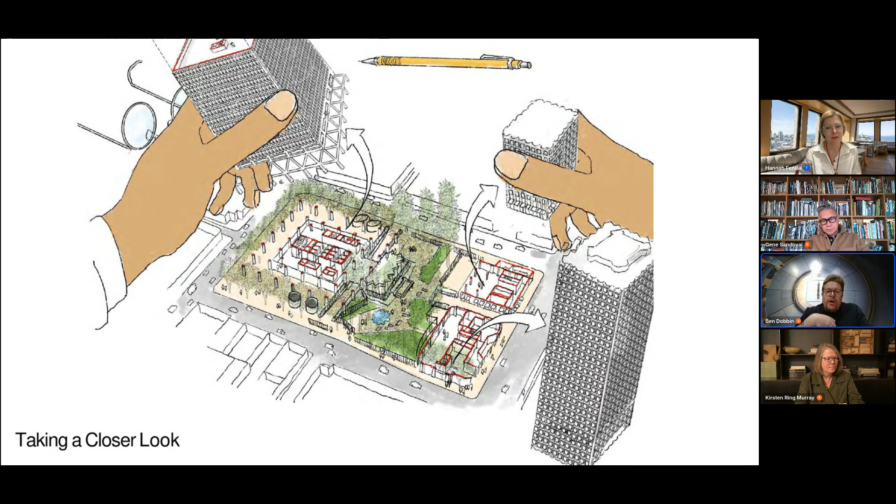For us, everything was about taking it apart, really examining how the parts relate to each other, what's been added which isn't required, what has been added over time, like accretions which weren't really in keeping with the original vision, throwing away some of those parts through the evaluation process, and then seeing what is the richest part of it.

For us, the Redwood Park, which sits actually almost at the back garden of the Transamerica Pyramid, is actually the centerpiece between these three different major buildings which sit on the site.

For those of you who don't know, the Redwood Park is a great refuge within the city. And that was really our starting point: can you take the spirit of the Redwood Park and spread green and unite the site in a carpet of green and planting and biophilia to mend around the edges of the city.

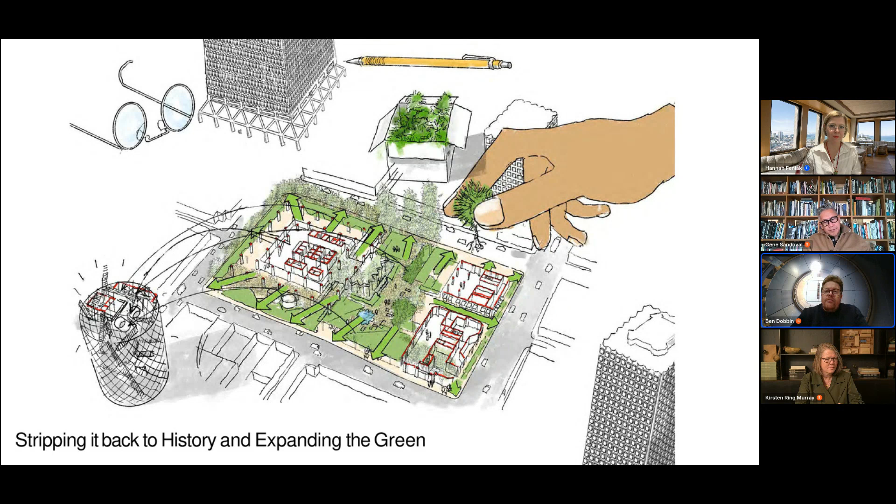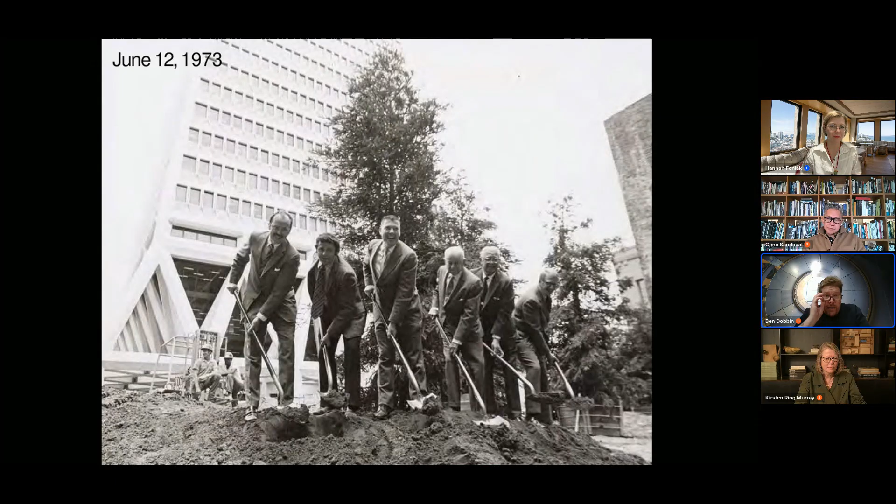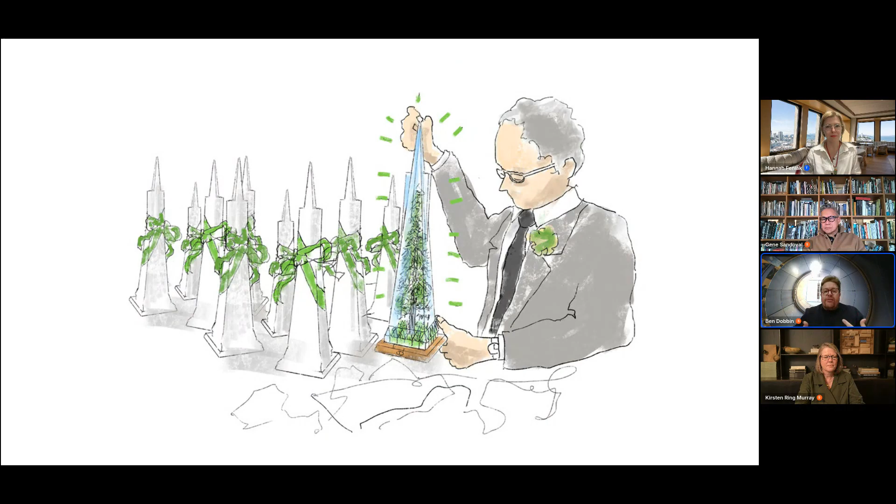This photograph is really brilliant because it shows, in 1973, planting those redwood trees, which were only about 15 feet, 5 meters tall at the time. And they've grown to 60 feet, 20, 30 meters tall. We consider those really a gift from history. So when we talk about how we work with existing buildings, they are a gift. Someone, an architect, a great thinker, a landscape architect, had a vision, and something like a tree which grows over 50 years to become something really iconic, something you couldn't even buy today if you wanted to do it today.

So that's back in the 1970s. You see those tiny little redwood trees, which were grown in the Santa Cruz Mountains, and then what they grew to today. There's a lot of features here which are original, the kind of pixelated edge to the water pond, not the frogs which are dancing within it, not the stage which is over here, which removed a number of fruit trees from the park.

So for us, it was like, how could we actually mend this? The ramp over here was not original. So we went back to even the landscape architect's drawings, and there we found, for instance, there's a row of trees. If you see that horizontal lane, which is Mark Twain Alley, Mark Twain Lane, there's a row of fruiting trees which were coming down there. So there were a lot of clues when we went back to the original drawings, which told us about how we could actually bring the building forward in the future.

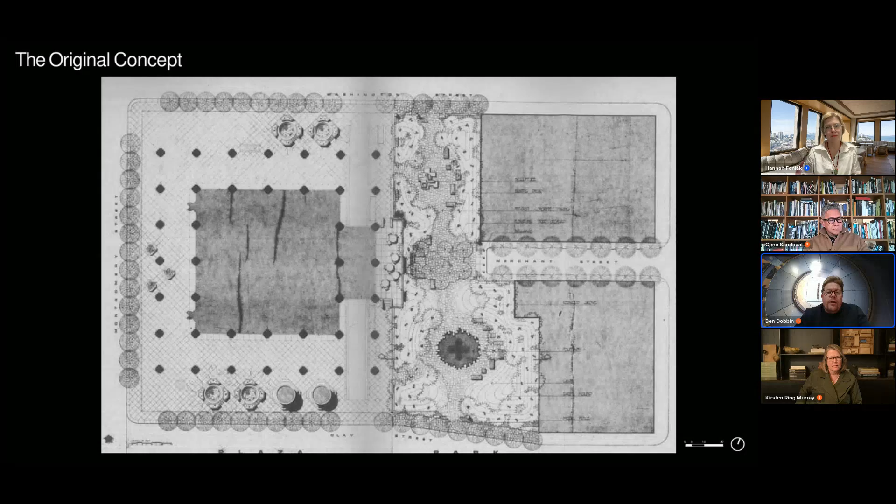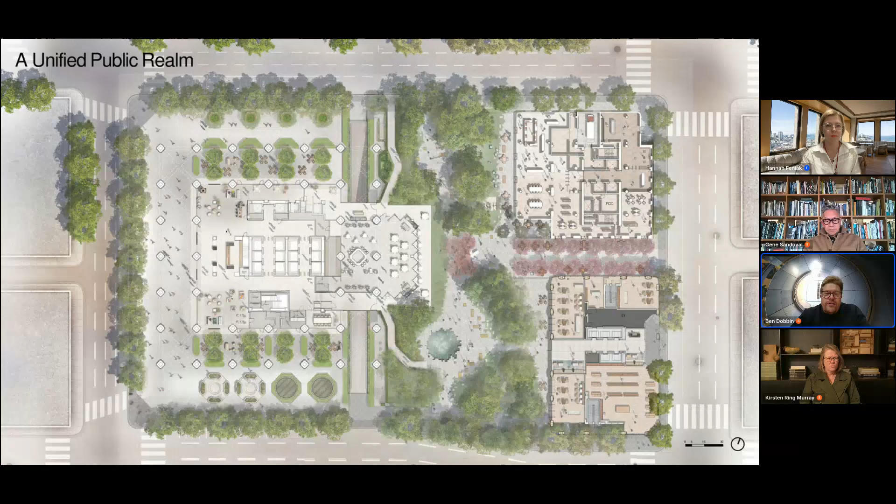So the vision here starts to unify green around the site. We're planting those fruiting trees all the way along Mark Twain Alley, and we're seeing the Central Park as a uniting feature between all the different parts of the building, the master plan.

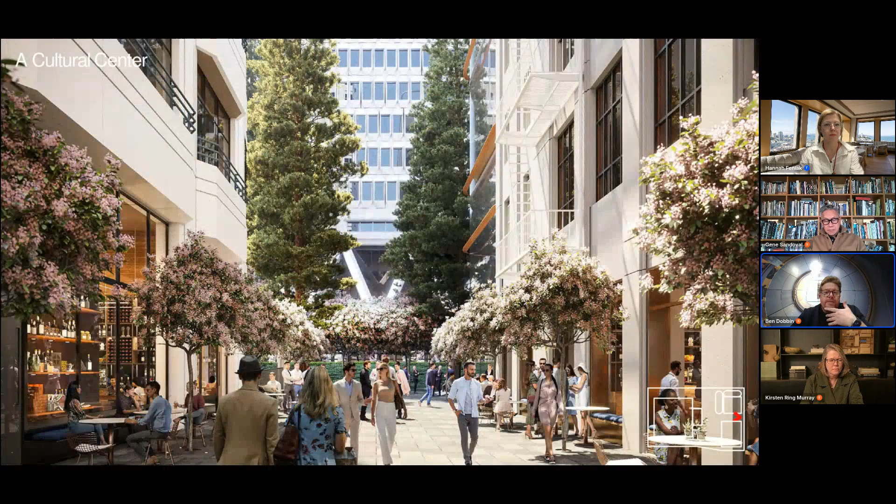And a site which was a park that was walled in, we removed those walls, and what it is today actually expands the feeling of the park. So the park actually doubles in size by building out these open seating areas which are fully open to the public during the day.

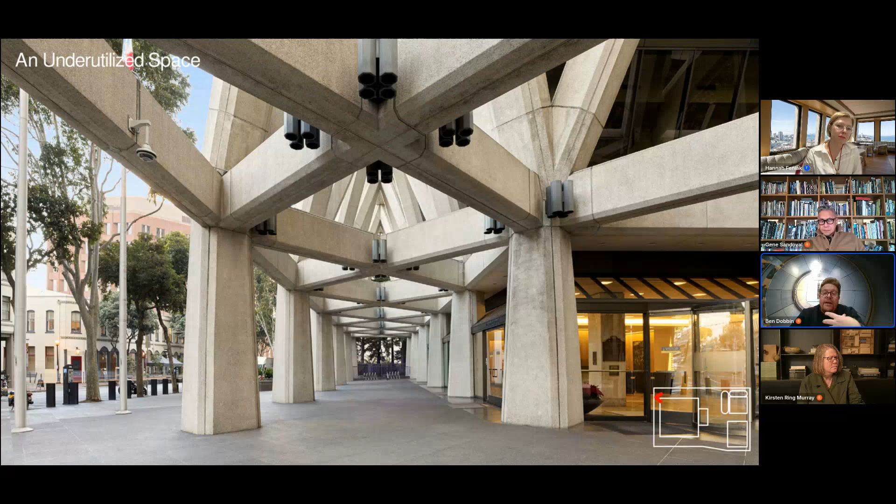And of course, expanding the green. So we planted trees throughout this colonnade and actually made it feel more natural. And we broke down the facade, which was around the base of the building, opening it up to a pure, clear glass facade with a minimum number of structural elements. So we really dissolve the boundary between inside and outside. And then we brought the seating outside as well, and this is seating which members of the public can also use and come here. So we're actually giving, the building starts to gift out to its environment.

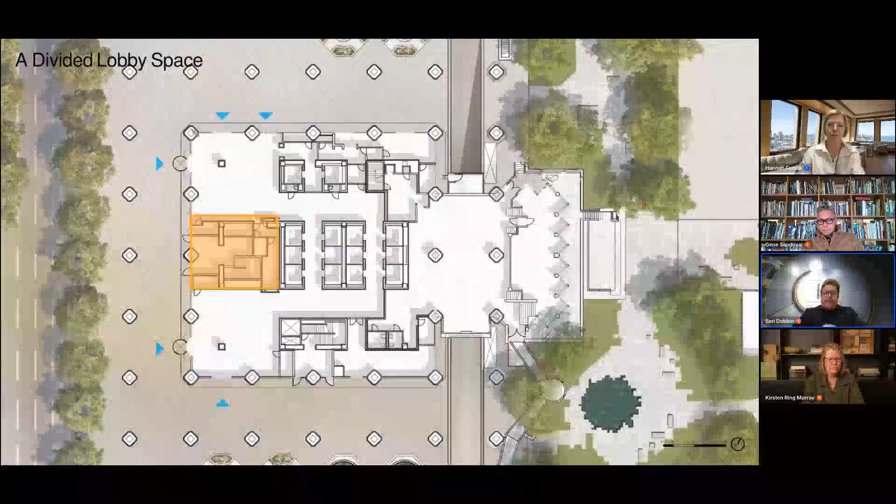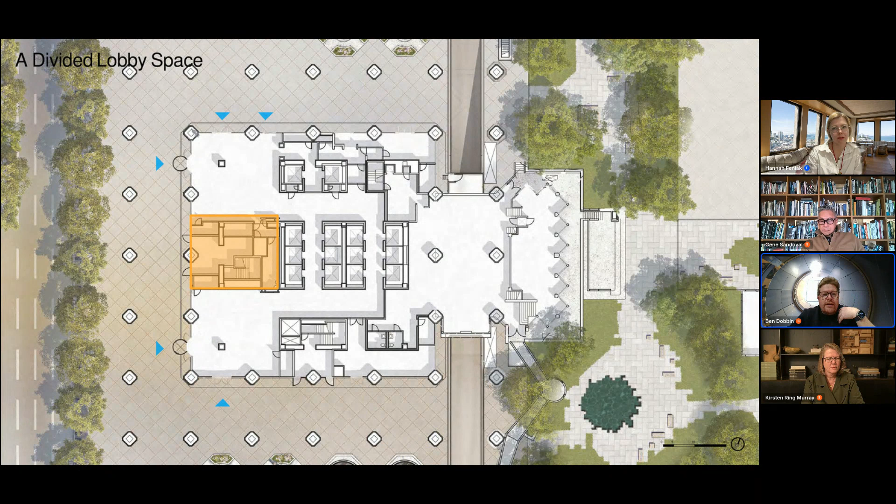Crucially, the building, when we encountered it, had two lobbies which were separated by this core, which is highlighted in orange. And that sort of comes from the early days where there was a banking floor at the base of the building, and there was a corporate tenant taking ownership of the whole tower. But this plan moving forward was to create one unified vision. So we were able to reroute the escape stairs and a lot of MEP and create one unified lobby together.

And that gives something back, again, something of the sense of arrival, something for the people who are using it, and create spaces where people can also meet clients before and after meetings. And what was a very closed environment—you can see half of this facade is actually opaque—we could actually transform it and make it more open.

And with that came raising the ceiling on the inside, removing several feet of ductwork, going to a radiant slab with a minimum fresh air approach. And so then the structure of the colonnade could run through horizontally and again dissolve that boundary between inside and outside.

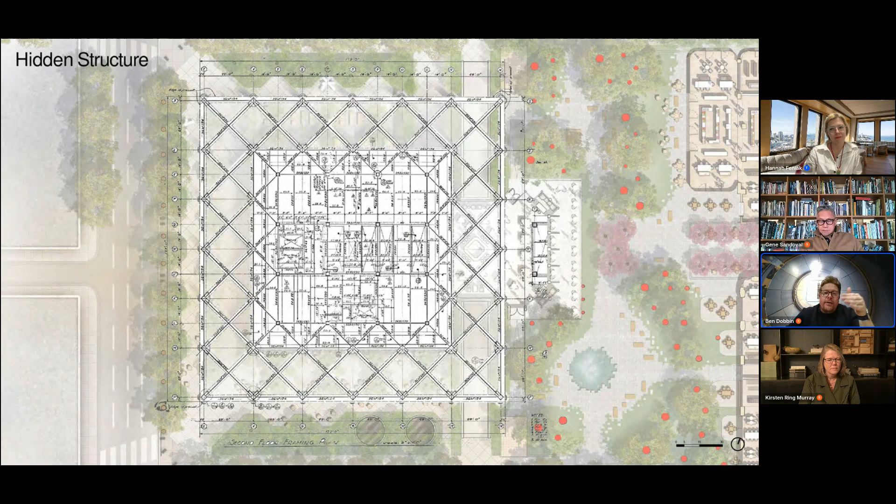This is the horizontal framing plan at that colonnade level, and that diagonal bracing structure continues onto the inside. So we used that plus the kind of innovations of seismic design which were incorporated into the original design—this cross bracing, which featured in Welding Design and Fabrication Weekly.

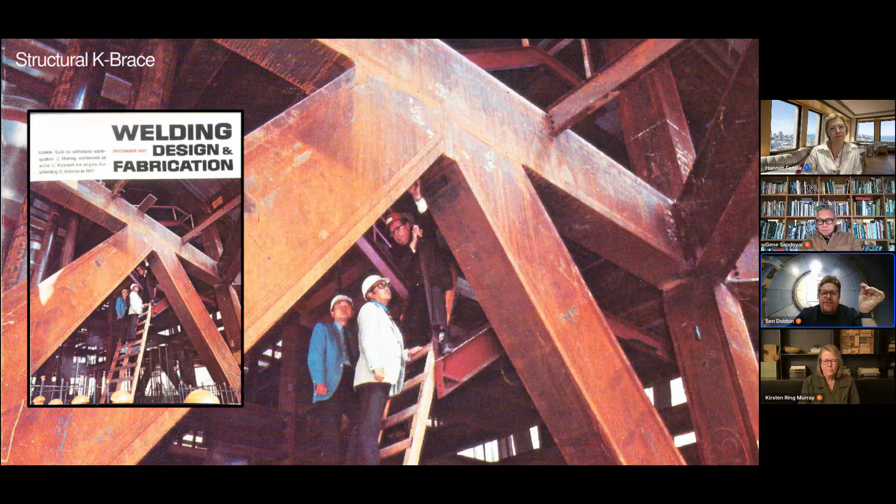This is something we then brought out of the concrete, and we exposed it, and we made it a feature, which then becomes the sense of arrival at the building. It's a kind of a portal, which was originally like within the building. So we uncovered things which were great strengths of the building, then made them features which actually become expressions of the building's architecture.

And we had to be very careful then in how we followed through the detailing of the external architecture into the internal architecture. The concept we were carrying forward is to work in balance and in collaboration with William Pereira.

So we really studied the detailing of the precast framing around all of the different structural elements, and we carried that forward faithfully. And then the challenge was to match the concrete material, which had been aging for 50 years on the outside of the building, and how to transform and bring that into the building.

We worked with the same fabrication company who'd made the precast panels back in the 1970s. We did have to go through about 50 samples, though, to get the right color match, but that was an effort well worth it for the result you see here, where it becomes almost seamless as to where the historic starts and the new begins.

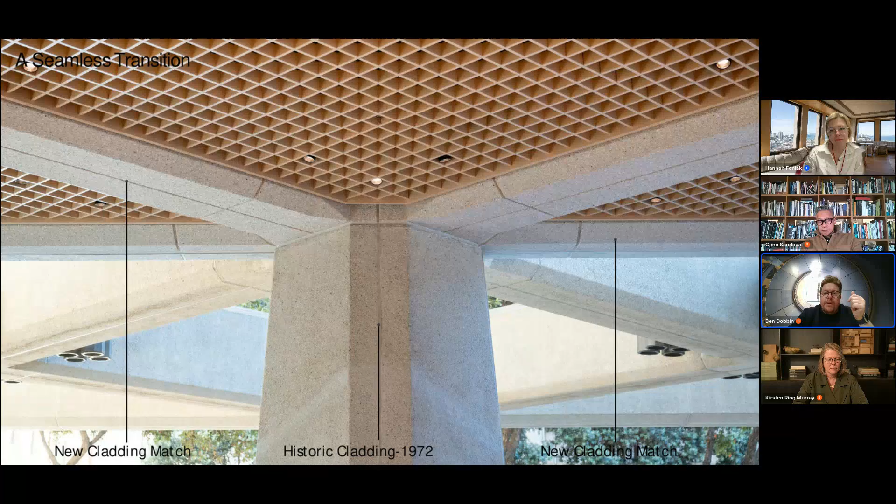And in this case, I think that is entirely the right thing to do, because we're trying to create that experience of bringing people into the lobby and breaking down the boundary between public and private. So that was really a transformation at the ground floor, which was at a larger level, at the master plan level.

And then we made a few further interventions higher up the building. So level 27 is the transfer level from the lower elevator bank to go into the high-rise elevator bank.

And so that becomes an interactive level, a lounge level between different people who work inside the building, and you can bring tenants there. The level below that is a gym and wellness area, because that's also just off that sky lobby level, so it's easy to get to for all the tenants of the building. And then there's a marketing suite, which I won't dwell on today.

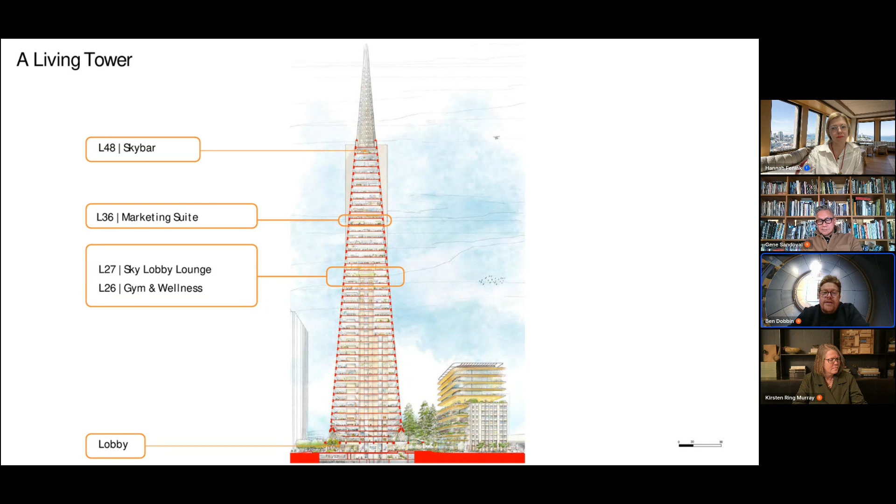And then at the top, we transformed what was formerly the boardroom for Transamerica into a sky bar. So this then becomes the gym level.

So transforming that experience using a lot of reflective glass to bring light from the outside into the depth of the plan, and create one long zone along the edge where we broke down a lot of the smaller containment of areas to create one big space which would unite. So you can be on your running machine, and then you have an amazing view across the whole of the San Francisco Bay.

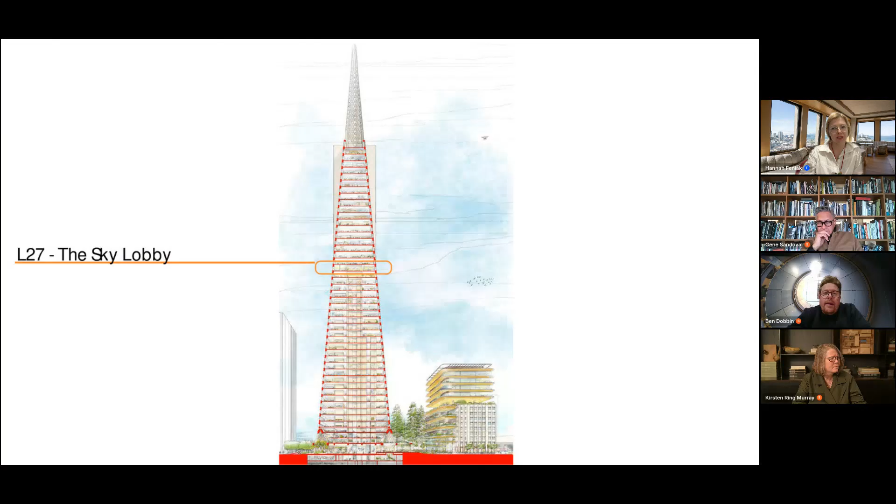And then moving up to the sky level, you can see here, you're on the same level as Telegraph Hill and the Coit Tower, which is another great icon of the city. You're looking across the North Bay, and for those who know San Francisco, you can see the Golden Gate Bridge, Alcatraz, Angel Island, Oakland.

You can see all the ships moving backwards and forwards to China. It is an incredible space. And this is our Sky Lobby, and it unites everyone—everyone can come to this space. It's a place to meet clients. It becomes almost a center of culture.

And then there's even a sculpture which Norman created within the boardrooms at this level. And that, I think, is a really strong link to the clouds, which somehow spread within the city of San Francisco. And then the last floor...

becomes a bar and cocktail and event space at the very top floor with amazing views across San Francisco. It's a place which again becomes a community for the tower. People come together here for happy hour. You can bring clients here. You can rent it out.

So this amenitized office is really bringing this landmark forward into the future, and really thinking about how it lives on into the next 50 years of its life.

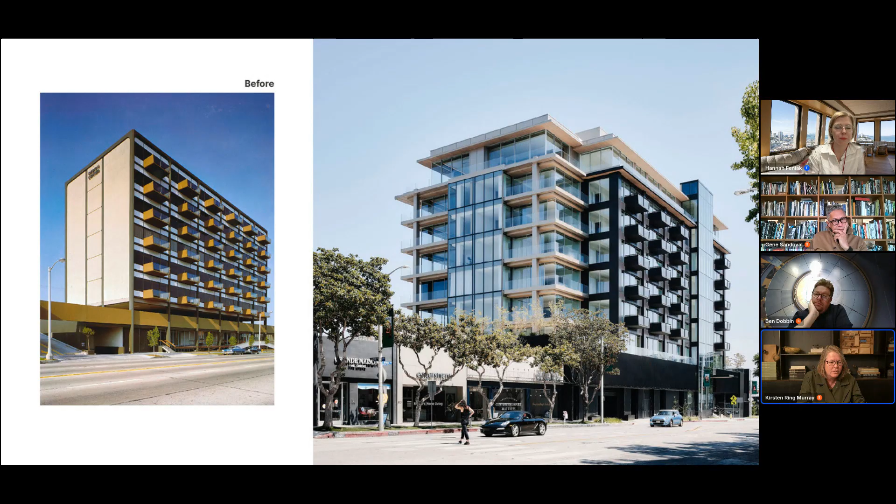So you can see here, this is a little bit of a before and after. And I think at the time, this was not a historic building at all, not historically designated—a building that maybe only an architect, or a design geek so to speak, can love. It had really a lower level of use; most of the upstairs office spaces were vacant. It had become rather run down, but of course its value was in the embodied energy within the concrete structure.

That's primarily what this building was. Some aspects we thought were really important to preserve and celebrate within the facade, including these really distinctive balconies, which we did a subtle edit to make code compliant for today's uses. And then this concrete megastructure, which, as you can see in the larger elevation, we actually contrasted with a distinct black tone so that it was legible and read as an element within the original composition of the project.

So the project really used the transfer of development rights along that townhouse corridor to be able to not only convert this use, but expand it in three directions—to the east, west, and north. You can see in this juxtaposition of the old and new where we did this more glazed, light expansion, which was really necessary as it was going from an office to a residential use.

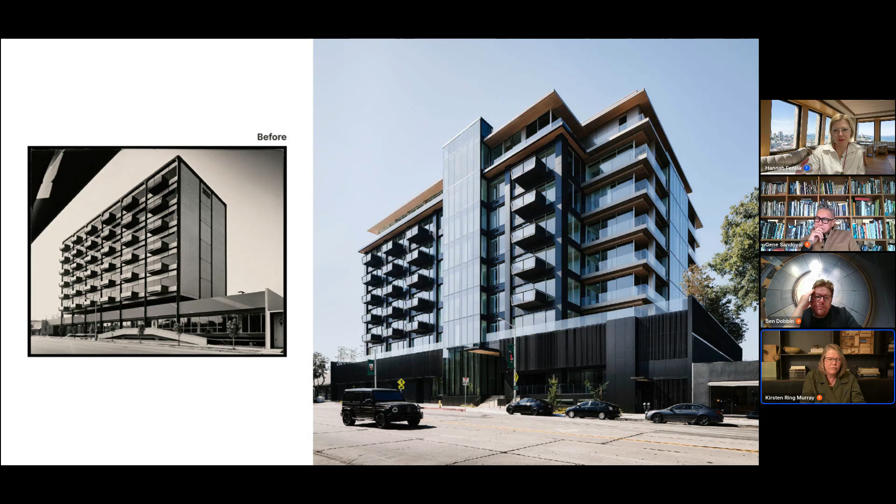A lot of our amenities went into some of these elements in the podium. We also introduced a vertical glazed element to really mark the point of residential entry into the project, which we felt gave it a sense of hierarchy and a legibility of function that we needed within this conversion.

Here are a couple of plans. To the left is the ground level, which shows our entry condition and how it basically breaks into retail units. To the left you'll see our parking entry, and up and to the right, there was a variety of different residential scales, from studios to two and three bedroom units and everything in between, including a floor of affordable rental units that had two bedrooms.

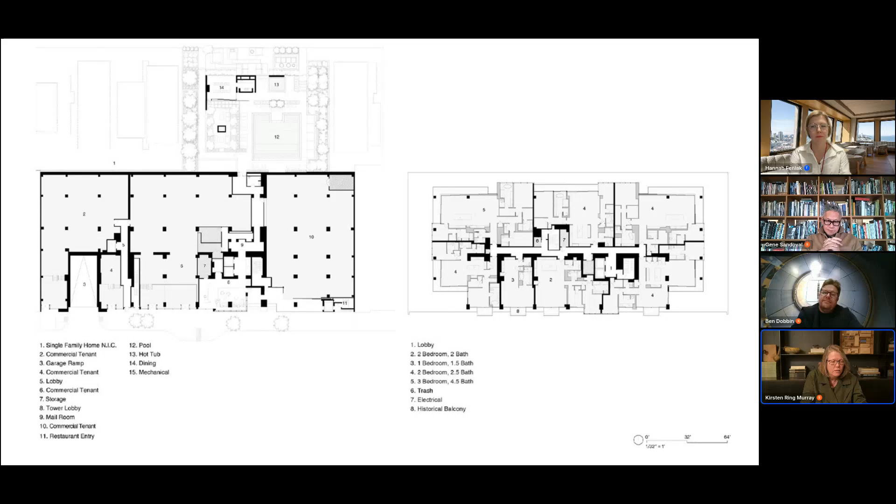In section, now this is, I think, one of the things—and actually when the project came to us, I think we were surprised by the ambition of the project. It was somewhat of a humble commercial building, and one of the ambitions was to replace an elevated parking structure that wrapped the base of the building, change the uses, fulfill interior uses into that space, but also excavate underneath the entire townhouse portion of the block.

We also did have to do a lot of excavation under the building structurally. So that allowed us to put all of the parking that had been existing in above-grade structured parking below grade, which was significant. Also to the right of this image, you'll see a few things in this section.

I think one of the things that was beneficial—and this was really before there was as much dialogue about underused office buildings, I think it's been sort of a COVID-era goal, to think about what to do with underused office buildings in residential conversion. This was a little bit before that dialogue was at as high a pitch.

But one of the challenges is dealing with the integrating of systems, particularly plumbing systems, which are much different in a residential building. But we did have good twelve and a half foot clear heights to work with, so we were able to accommodate and weave through a lot of those systems and make it a viable project from a development perspective.

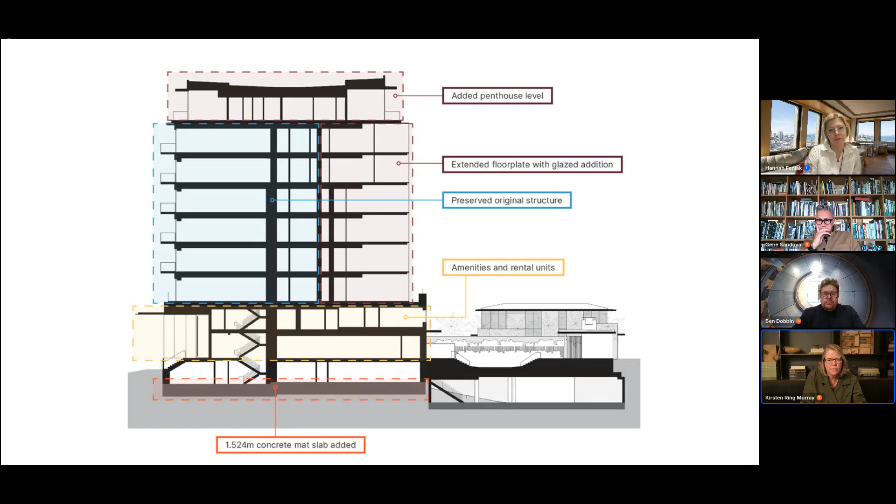Again, we have another shot, as we did see with the Transamerica Tower. The below-grade construction, I think, was fascinating. We did have to reinforce and bring the building up to contemporary seismic performance.

We introduced basically not only the excavation that allowed us to put in this below-grade parking, but also we have about a five-foot deep mat slab to meet some seismic requirements. That was all done with the structure of the building in place. There was also a lot of carbon fiber wrapping of particularly sensitive connections between the concrete column and the waffle slab structure.

In this parking, again, we're in Los Angeles. Parking is important, and in fact, we had a parking requirement, and we wanted to actually elevate the experience of the parking.

This is one of the areas that does have a valet condition, so we're pulling that loading and unloading into restaurants and some of the retail. We have an opportunity to pull that inside and really treat it as an elevated space, in addition to some private garages. And to the left is our parking ramp.

We really wanted to create a generous ramp so that we were minimizing car impacts on Beverly Boulevard. But again, just embracing the experience that the car really is part of life. It was important to the community that we were mindful about remembering that aspect of the development.

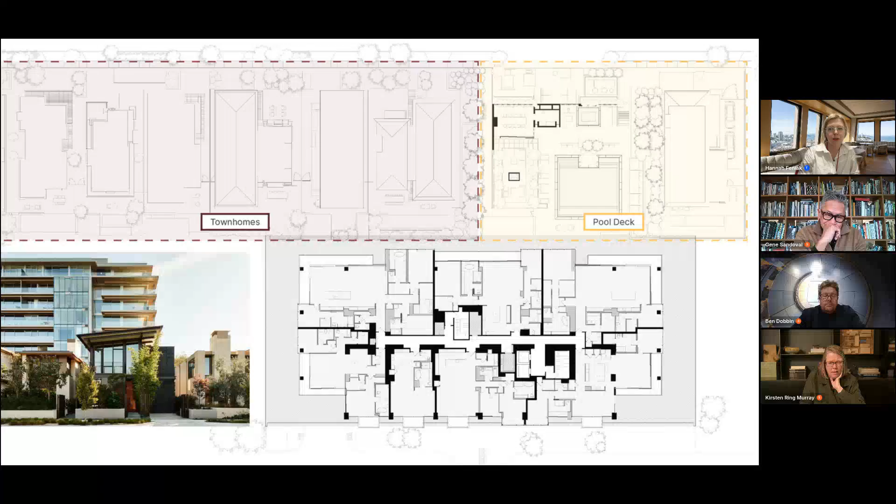A little bit of the interior, and then working with really compact spaces, we're able to create a series of spaces that really mitigate public to private conditions between the tower, the townhomes and the surrounding single-family neighborhood. To the right are some little pocket courtyard, backyard spaces and terraces that we created to really weave these different scaled elements together into hopefully what is a fairly nuanced composition of public and private spaces.

And finally, our shared pool amenity. On the left, you can see the feature of the lightness of the new expanded floor plate area, and then the maintenance of this mass and scale and expression of the tower itself.

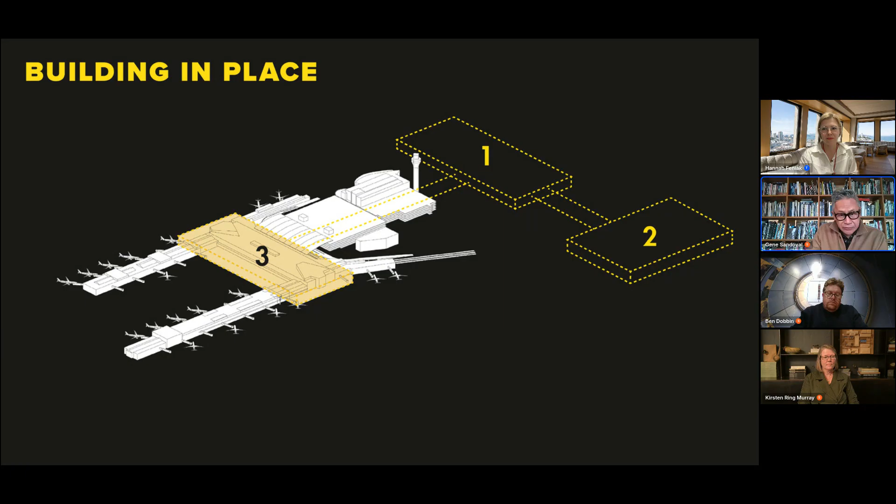Then the combination: how are we going to create something old and something new, or could we build it together? So just to give us an orientation, this is an H design configuration airport. What we wanted to do was build over the existing terminal, number 3, to double its size. There was a lot of conversation about where it needed to go, but we ended up going with configuration number 3 because it saved a lot of money and a lot of infrastructure.

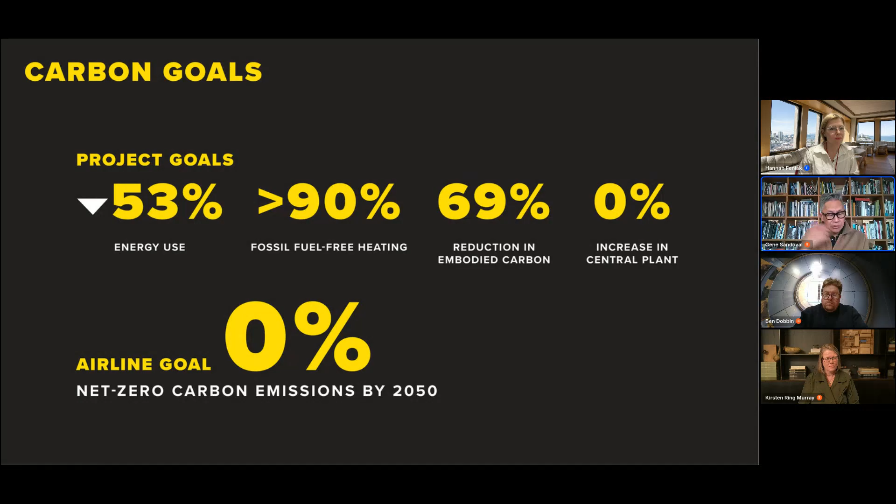There was a really high carbon goal that needed to be hit, driven because a lot of airlines signed to get net zero carbon by 2050, and they're struggling because the fuel development and engines are not there. So what we wanted to do was ask, what if we can lower your carbon footprint on the ground, and it would help with the overall performance of everything else that we cannot control because that's not architects' domain.

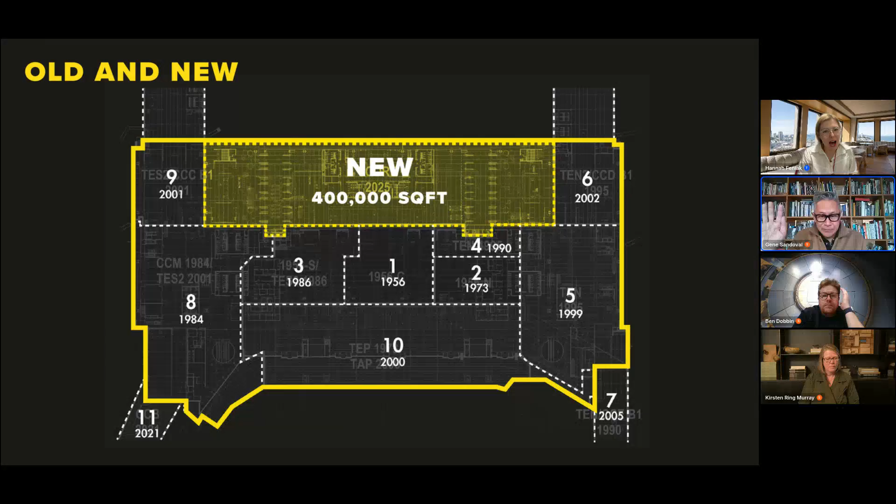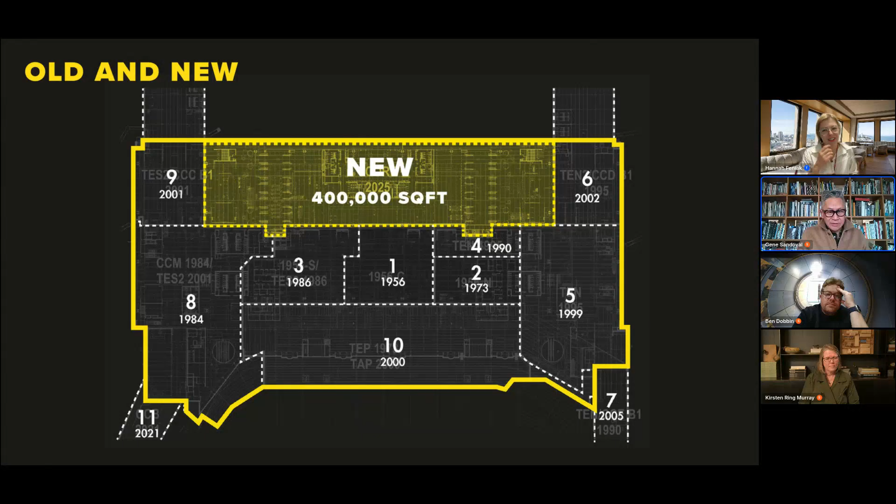Here again, the building—this is the terminal. It's 11 different buildings; part of it was mine and part was my older partners' that we worked together on. The whole idea is how do you stitch it together into one whole new building, even though you're growing the capacity to double the size.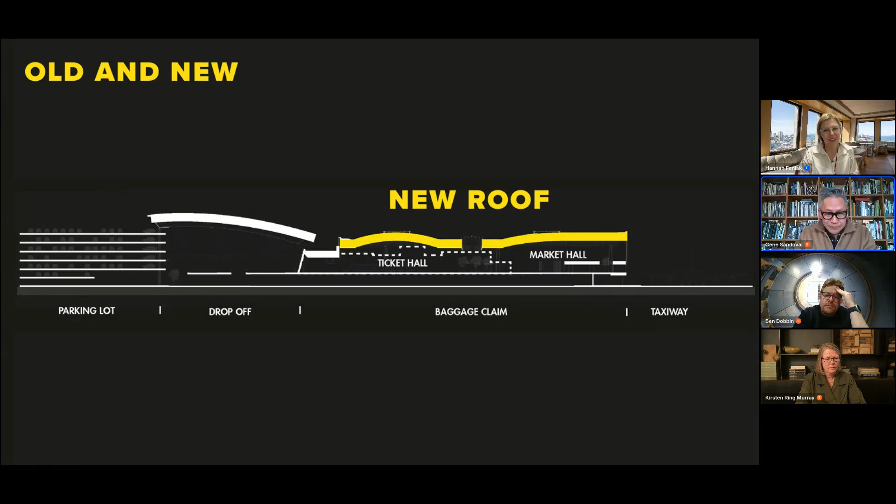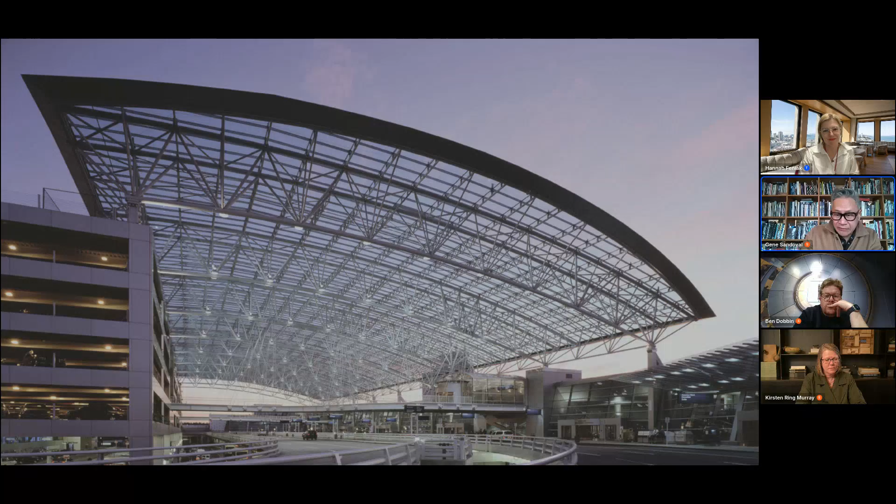Our thinking was, what if we built a roof over it to keep us dry and find a way to keep it safe? And there's been such strong language around it—this is the most beloved roof in Portland. It rains a lot here. It allowed sort of a welcoming of passengers who arrive and depart, and became an iconic memory for a lot of people. What we wanted to do was get inspiration from that big roof and create 2 more, so you could get a set of 3.

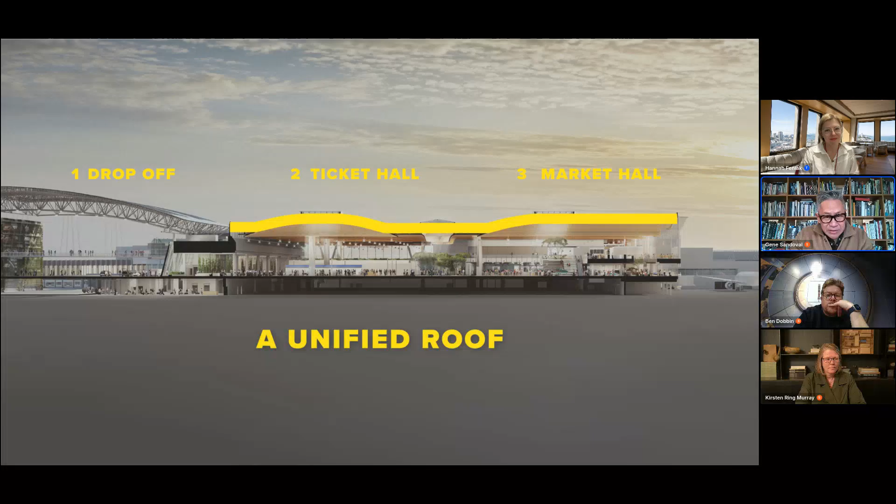At the same time, we're going to keep the baggage claim operational along the way. Now, we had a really daunting task. If you work in an airport, there's hardly any time to work in it because the runway is down for only a very short period of time. You cannot use a crane. So we had to be really creative in the construction side of things.

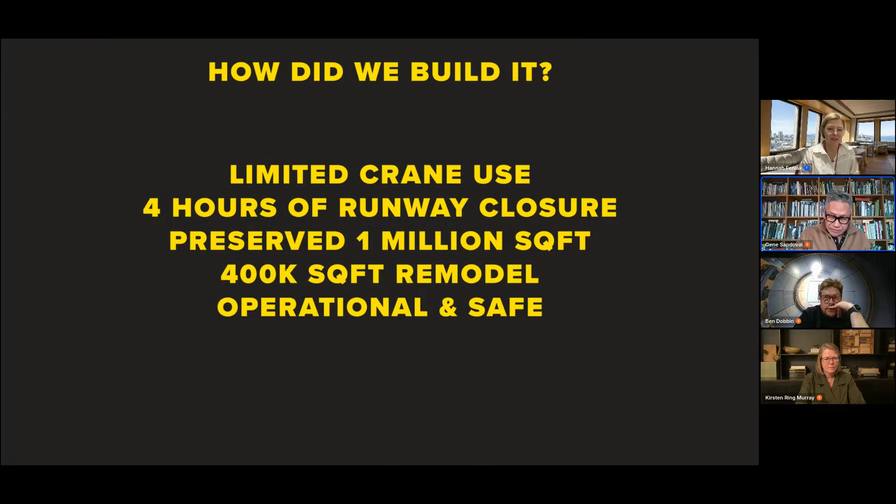So what we thought was, what if we do everything prefab? We thought, what can we do?

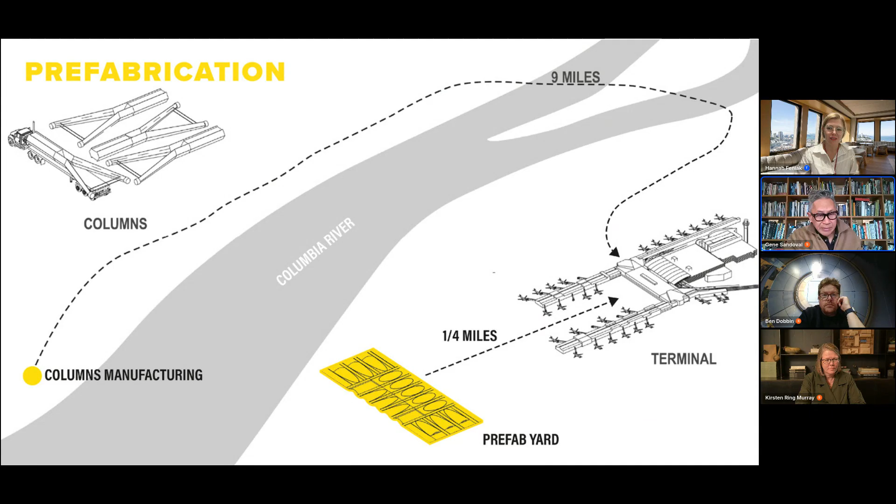A prefab yard about a quarter mile away from the terminal and runway, and then we used a steel mill about 9 miles away on the river for doing our columns. Those are all 70-foot columns.

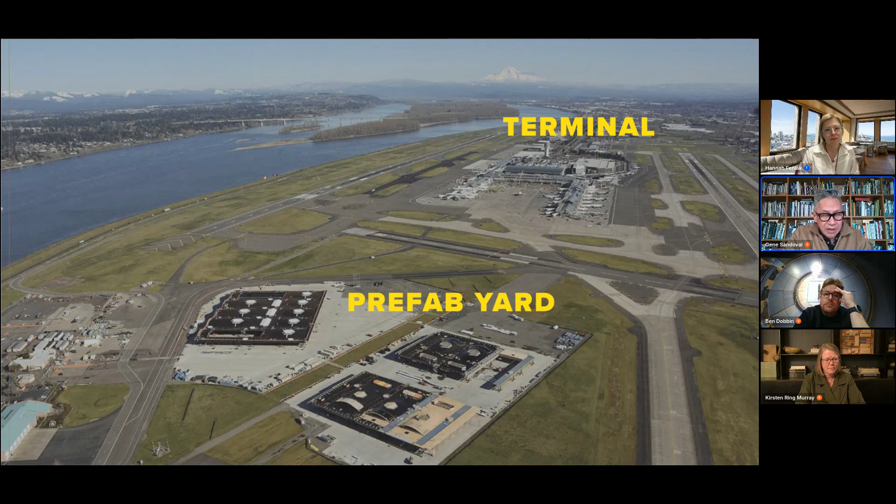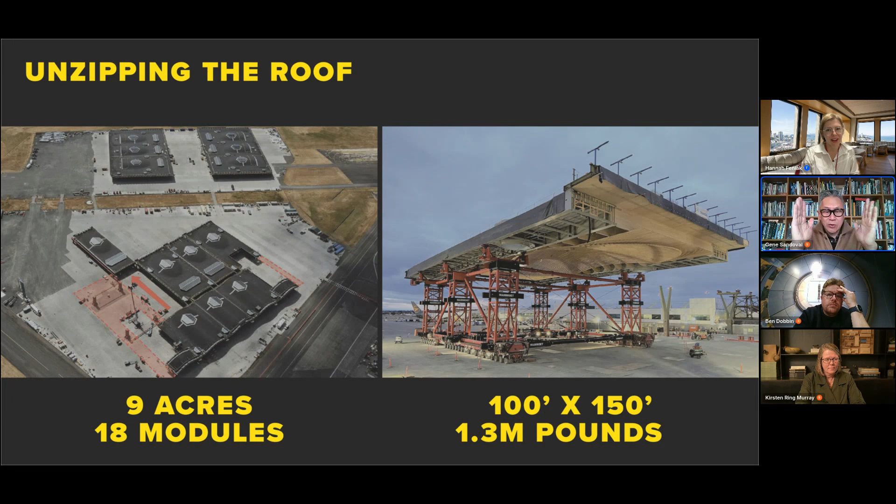Here's the picture: at the prefab yard, we're able to put 18 of those modules along the way. And then we would unzip this module in 100-foot bays and slip it in place within a 4-hour window to cross the runway in that one evening.

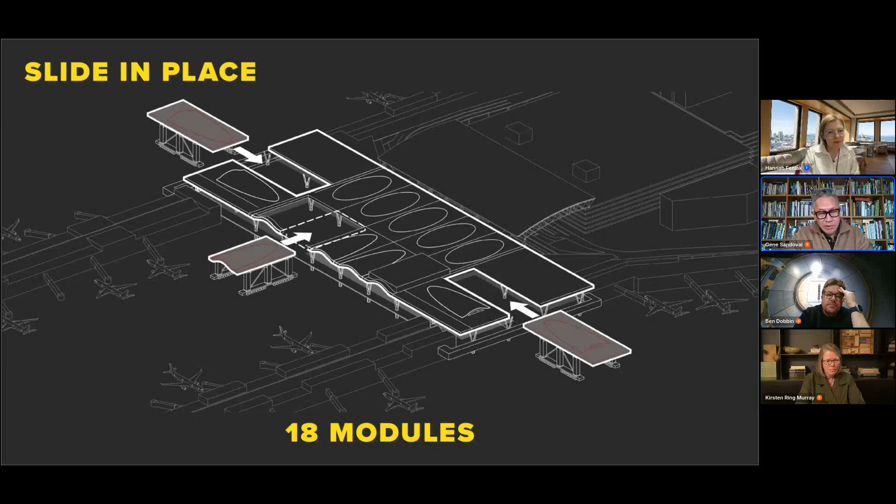As they cross the runway, we would slide them in place along the edges of the runway to complete this 18-module roof. But there was a lot of discussion of how you can do a 9-acre roof using wood. We said, why don't we combine materials and use each for whatever they're best at?

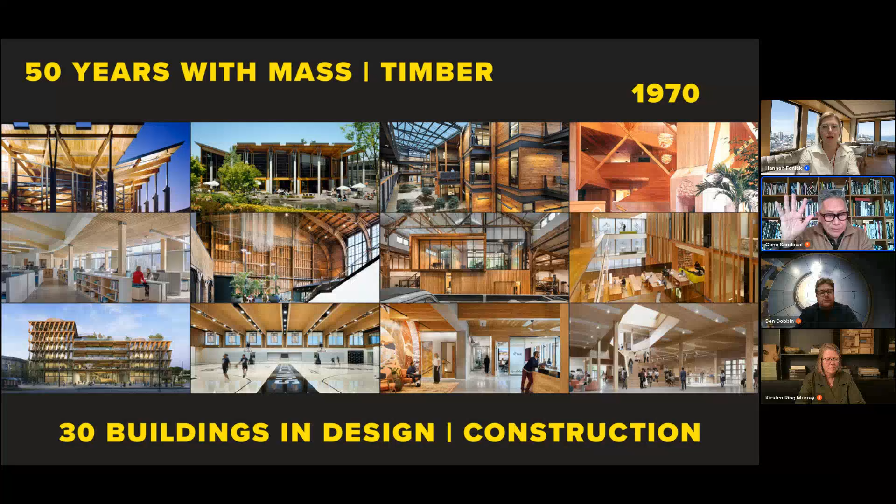Of course, it came natural. Our firm, being in the Northwest, wood is so natural to us. We've been doing wood over the life of the firm. Before it was called mass timber, it was just wood. It's what we do, so that practice became natural.

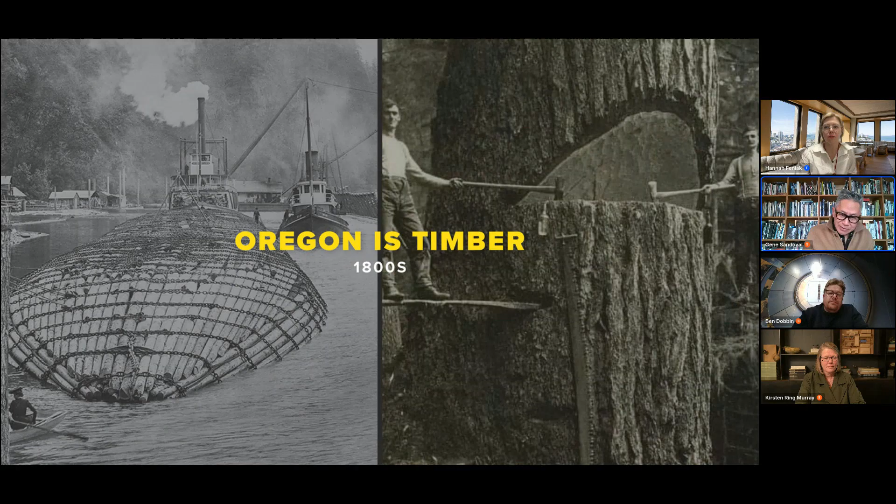For me, where I grew up, it was also the notion that you build within a place with the material and skill that's available. That's a vernacular architecture that a lot of the world has embraced over time. Oregon is about timber, and Portland is about cutting timber, so it came natural. But during World War II, Oregon became a steel place because we built a lot of those Liberty ships. So those are the two strong industries embedded within the city.

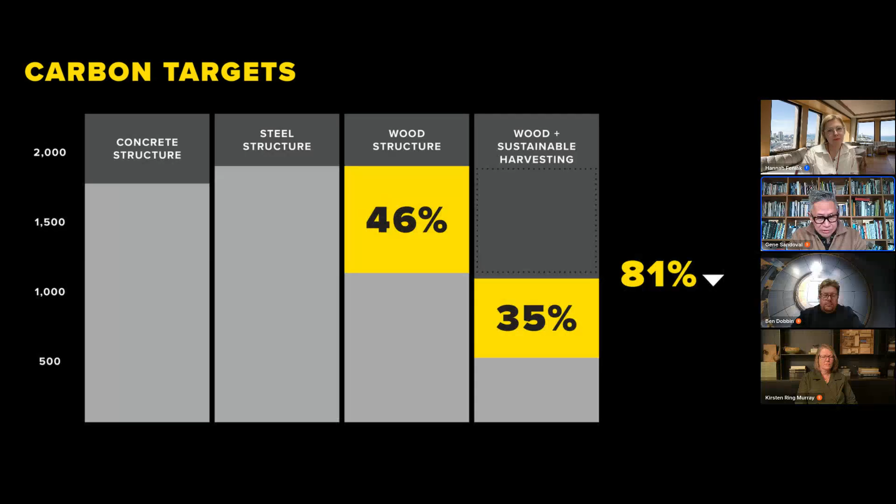Then there is just a natural thing: we want to think about what is the embodied carbon. Doing a remodel helps a lot, and using wood helped a great deal. But we had this idea—why can't we harvest sustainable farm wood within our region? That lowered the carbon footprint another 35%. So we're building the roof and systems with an 81% reduction in carbon right away.

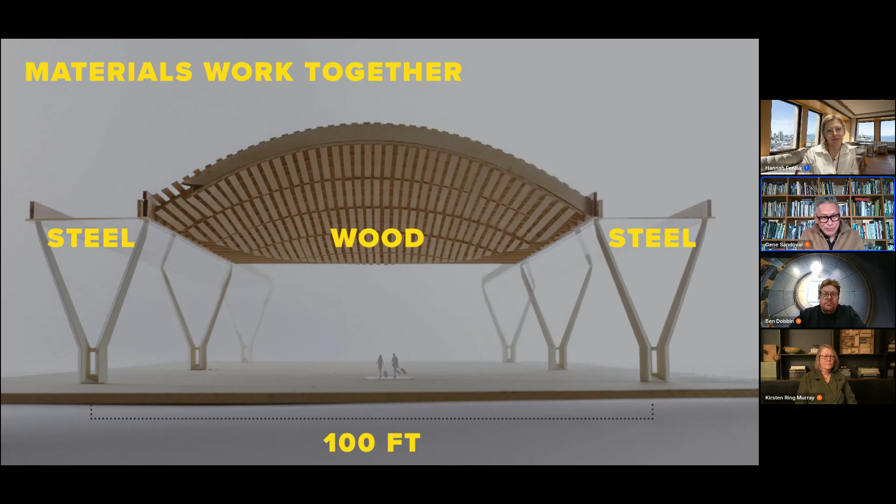So what happened was a graceful union between wood and steel, with all the sizing and dimensions really tied to what we can transport by highways and trains. It became a modular sense, a modular way of doing things.

This went all the way to the very end. We thought modularization would allow us to have a broader labor pool, but also allow small companies to partake in one of the biggest economic drivers in the state and the biggest building ever built in the state.

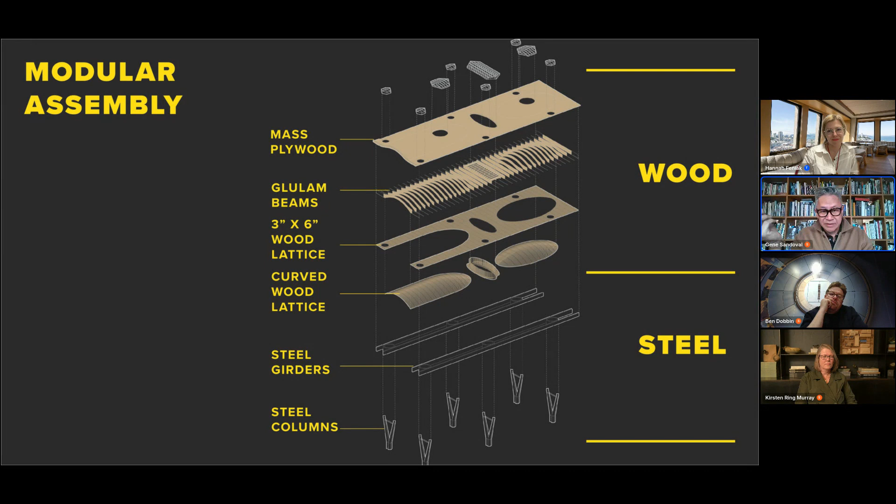This has never been done before, so we had to break into the paradigm of how people think and how they draw. When people think of digital and analog, there's this notion that when you design, you use parametric, and when you construct, it's analog. We reversed this thinking—as architects, we designed like carpenters, while the contractor used the computer in terms of the way they construct things.

I'm going to talk a little bit about that. Using analog, we were able to rediscover the properties of wood—that it's really strong in bending, really malleable, and comes in different sizes you can use. Using real half-inch scale models, we were able to design this building in a very sensible way so it could be supplied within our region.

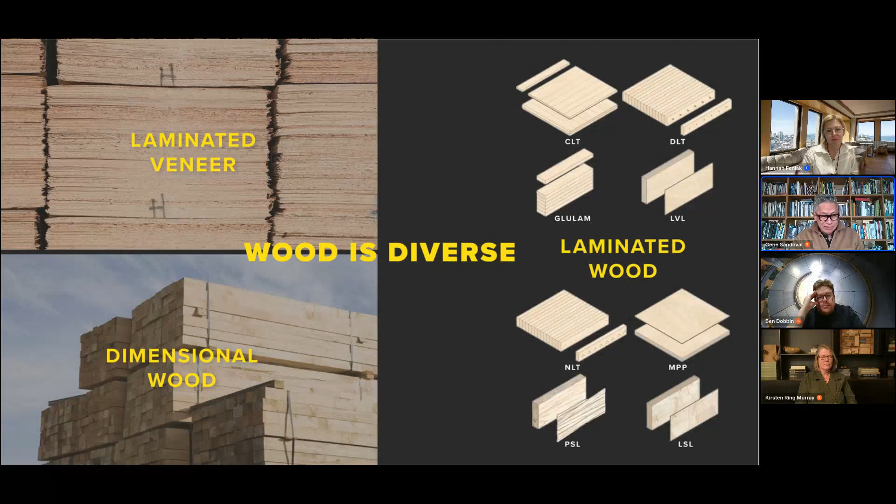We want to take advantage of what's available, and these are all the things available within a 300-mile radius in the system. This was happening during the pandemic, the whole construction and design of this building.

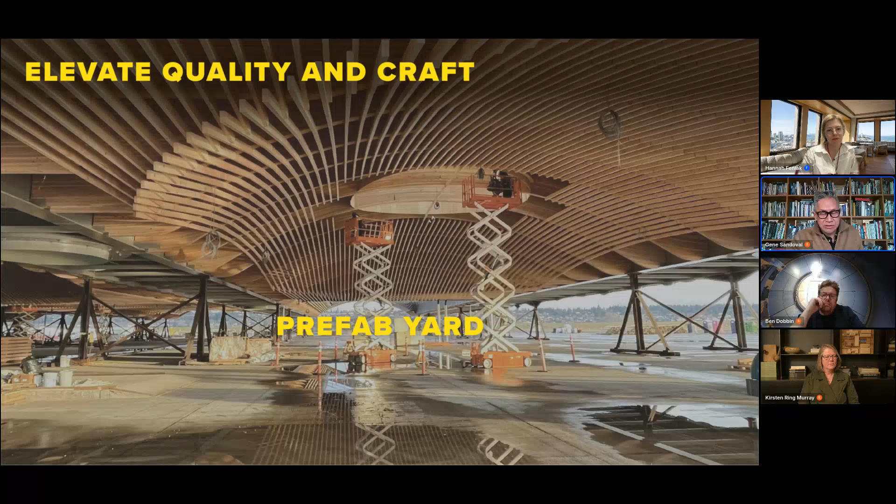Using these materials, we were able to facilitate the most efficient building system. We only had 2 people working in each bay assembling the rafters because they're only 10 feet wide, and we measured all the dimensions and weight. So we saved in labor. In this prefab yard, we lowered the construction height, so we saved on insurance, and we didn't have to put money into scaffolding. There were so many things in the construction that allowed us to put the money back into architecture.

Then the contractors used CNC machines and parametric modeling. So all those pieces, as you're going to see in this drawing, in this image, there's a grid on the floor.

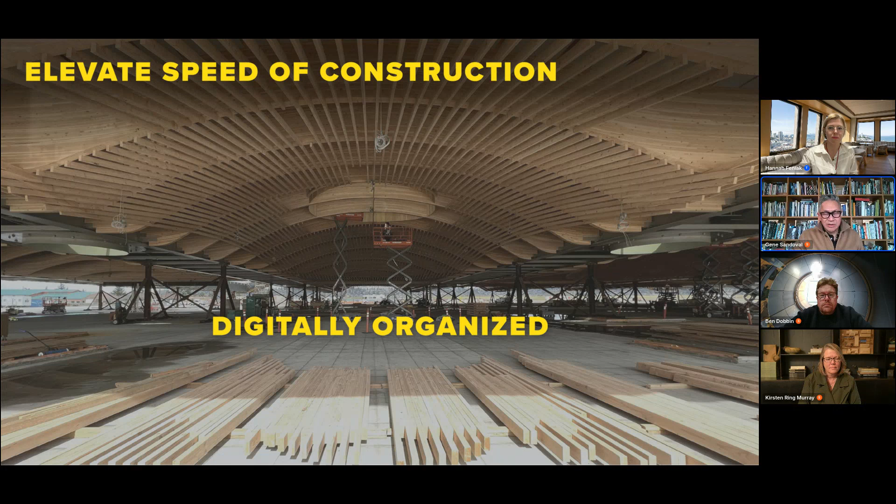Each piece of those wood pieces are coded and settled within that grid, so the installer could come in, look up, and install it directly. It saved a lot of time.

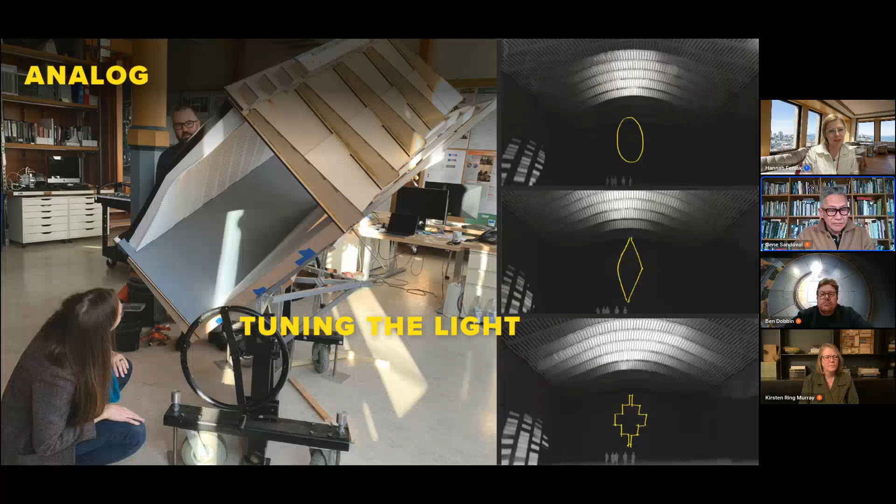But we went to the analog, to the physical model, to investigate light. You're going to see on the right, it's fascinating—those yellow different shapes are the same sizes in square footage, but had a very different shadow experience within them. So the physical model became a way of rediscovering the beauty of light.

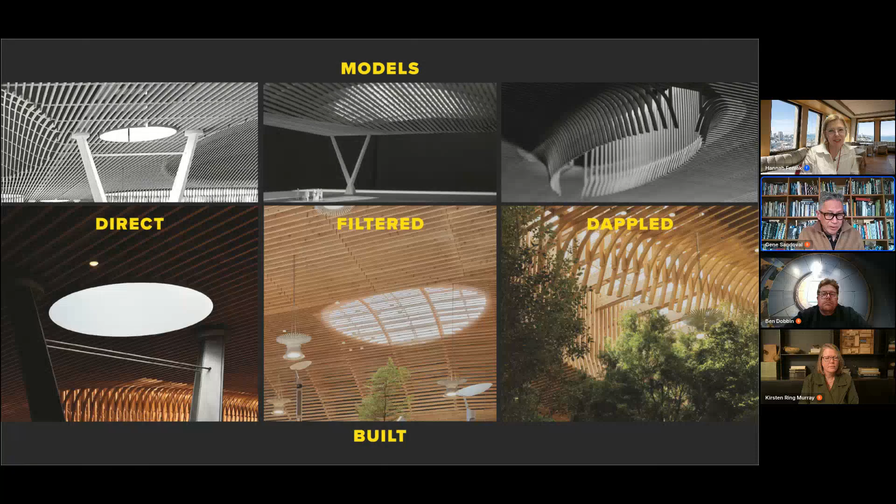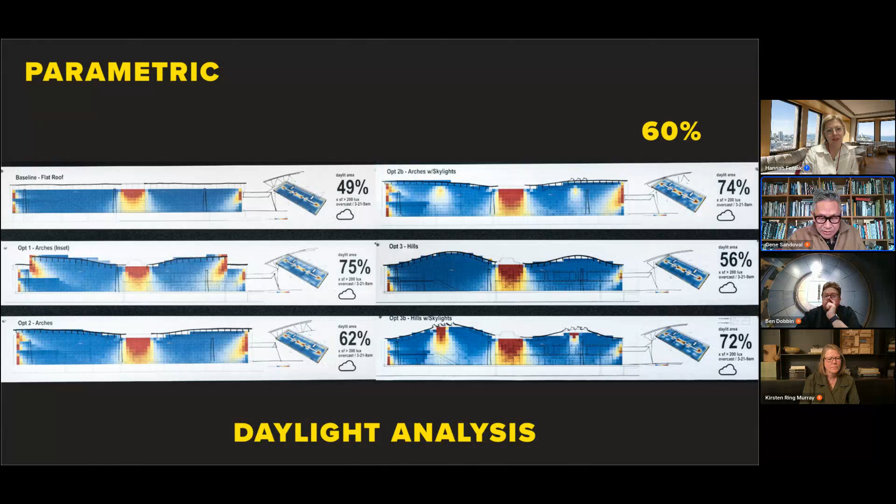Up above, you'll see a photograph of the model, and down below, the real constructed spaces. What's amazing about a physical model is that you can't really cheat—it really is the way the physical world behaves. But we used parametric modeling to truly measure where all these lights were coming from, and to position the right shape, size, and positioning to get 60% daylighting into the whole building.

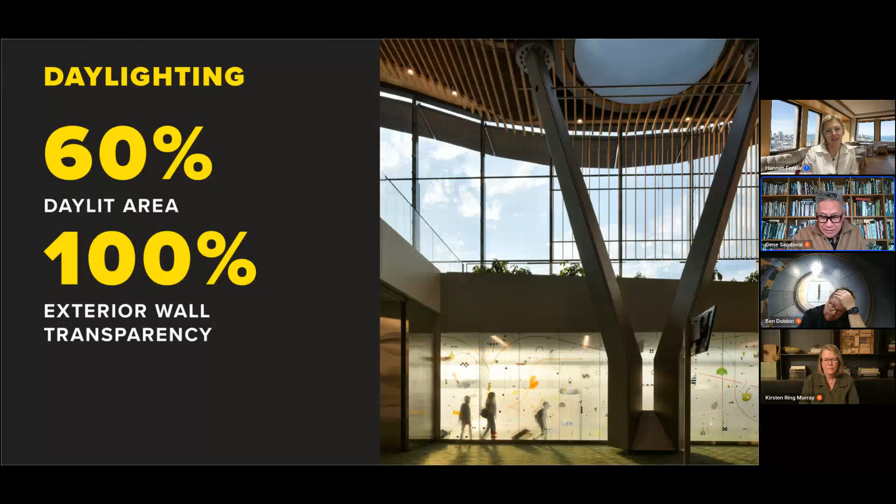What I'm saying here is that efficiency, metrics, and romance can tie together, and if you do it right, it could be truly magical. As we think about a building that is 60% daylit, this building has 100% vision glass—significant in a city when the code says you can only do 44. But because of how we designed it and used the natural environment, we harvested a lot of daylight for heating and lighting. This building grew twice the size, but what's amazing is how comfortable this place is. A lot of the workers truly enjoy being here because of the experience and the sensuality.

It's beloved because the regional material can express who we are, and because we used our natural resources within a 300-mile radius. It's very, very efficient—we almost were able to be net zero if we'd had solar panels on site. But it's pretty amazing because even as we talk about net zero, it's truly a very sensual building.

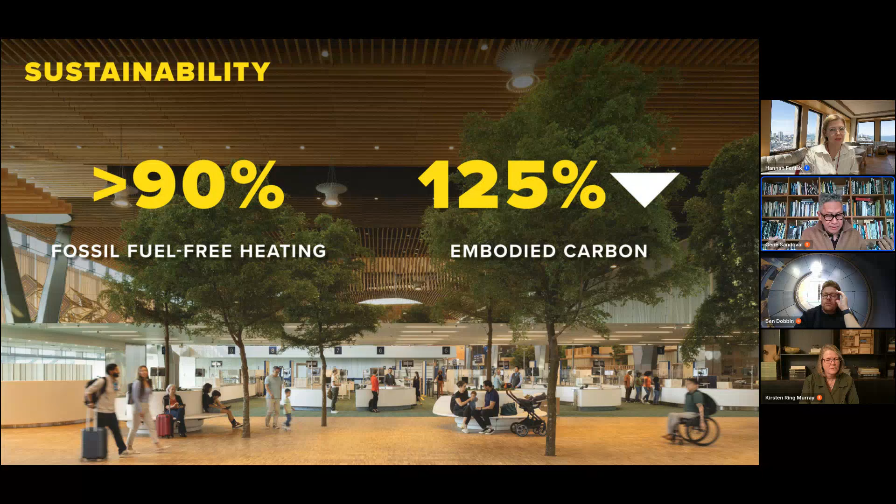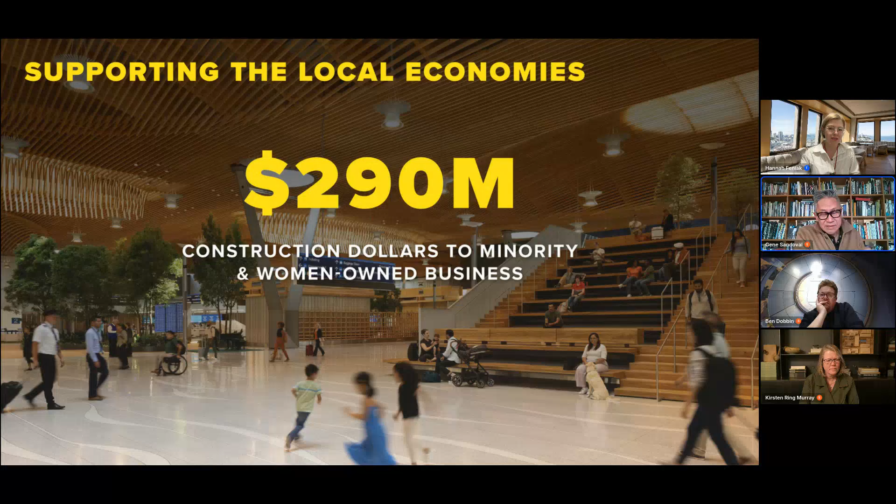It just makes you want to be there. It's become sort of the center of the city, and it's beloved. But the most important thing is that we were able to keep a third of the construction costs and give it to new businesses that are thriving, so we created a lot of new industry and economic drivers. And most importantly, it was inexpensive.

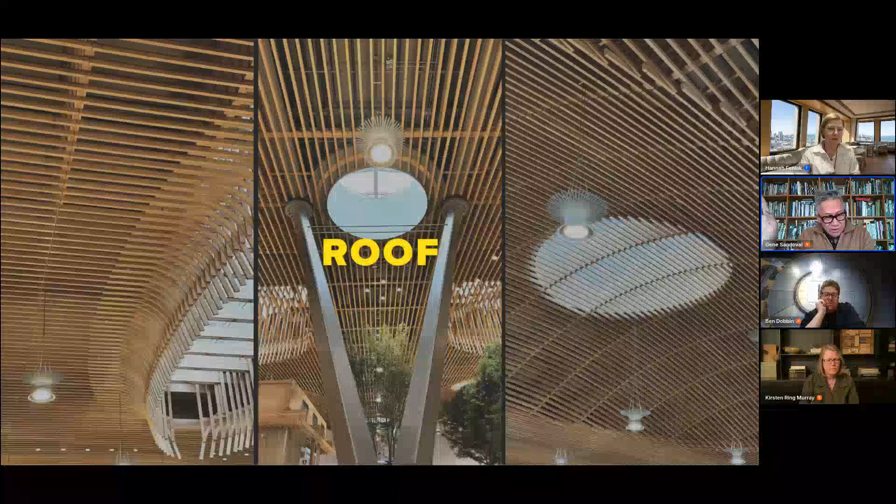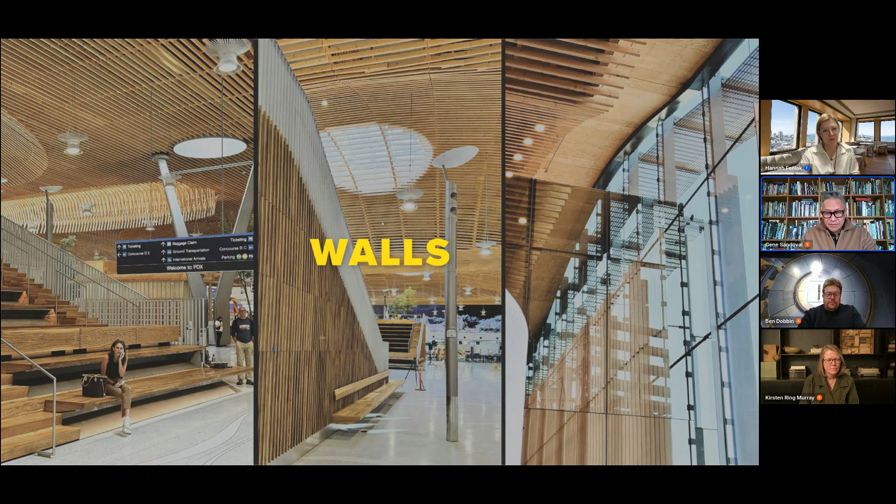The whole roof, all 9 acres installed, was only 3.1% of the project cost. Why is that important? If you go to any other airport, all the money is on the roof. So this roof is beautiful, with all the acoustics and performance tied to it. But we had money to bring the sensuality and architecture to the walls that people touch, to the furniture, to the little things that make it almost feel like you're at home.

So in the day of measuring success—how people love it—it's become sort of an Instagrammable space, and people are getting engaged in it. So I think we sort of succeeded, and hopefully it becomes embraced more as we tie the natural environment, the forests, to what it is as a building—combining this idea that harmony and delight, whether old or new, can come together. Thank you.

Wow, thank you so much. That was such a clearly laid out, beautiful explanation of a really complicated project. Yeah, it's so incredible how many different things this project can touch, emanating from one space throughout the entire state. Absolutely incredible. So thank you all, thank you so much, Gene, and also thank you to Ben and Kirsten. I think it's amazing having all of these projects in dialogue. I also need to do a West Coast trip to come see these.